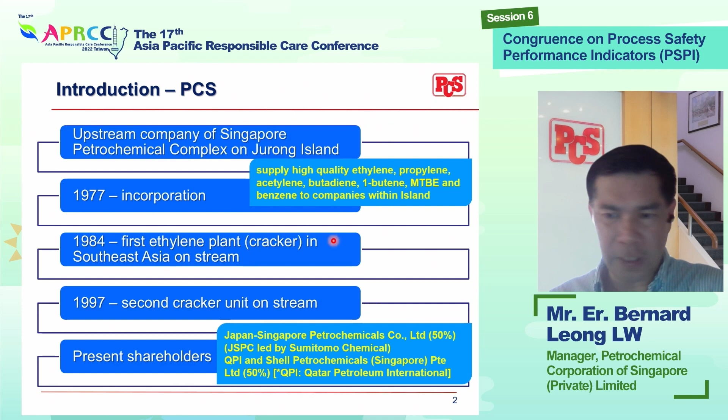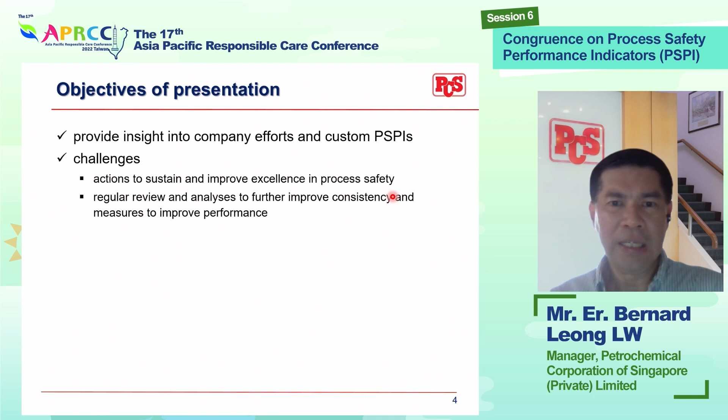For today's presentation, over the next 20 minutes or so, I'll share with you about my company's efforts and what we use as safety indicators, and also the challenges we face, how we're able to sustain and improve safety, and how we regularly review and analyze to further improve the extent to which we can measure performance.

Among the key basic requirements for this program is that it needs to be accepted and embraced by senior management — that's the key thing. In other words, it has to be top-down, and we report the indicators to management monthly and to the board of directors twice a year.

So what we want to do here is have an open discussion. Currently companies may or may not have such a PSPI, and many times we see that companies sort of keep it close — in other words, there is no open discussion on the selection and also the trends in the industry.

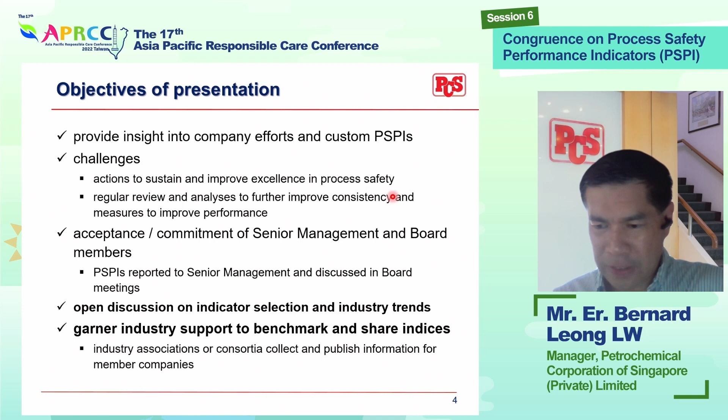I would like to get support from the respective countries' chemical associations, to establish some kind of benchmark and platform to share such indices or indicators. I'm glad if the opportunity arises, perhaps two years later, I can share a continuation of the effort that has gone in after today.

Common indicators are used widely, not just in the process industry, but also in business and economics, even for a country—GDP is a form of an indicator—to measure economic, business, and even operational performance.

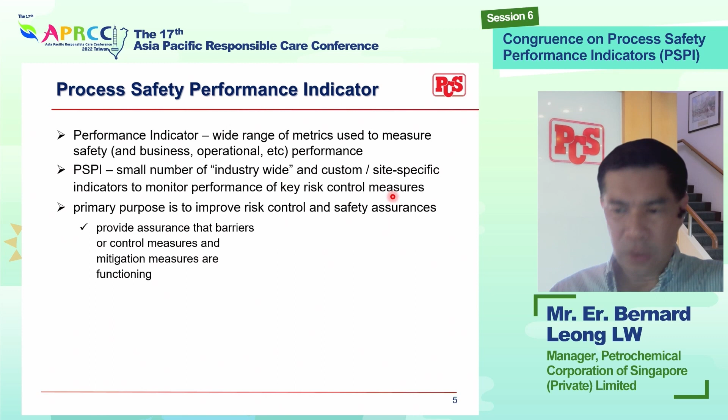Process indicators are mostly restricted to the process industry, and are customarily site-specific indicators to monitor the performance of key risk control measures. The purpose, like all indicators, is to provide assurance that your barriers towards incidents, the control measures, are functioning well. This is the basis for most safety performance systems, like the familiar Swiss cheese model.

We do not want all the holes to align to prevent any incident. So how do we do that? Each one of these layers may be an indicator, telling you whether you're in the right direction, whether you should move the layer in or out, so as not to have it aligned to create a hole or allow any incident to happen.

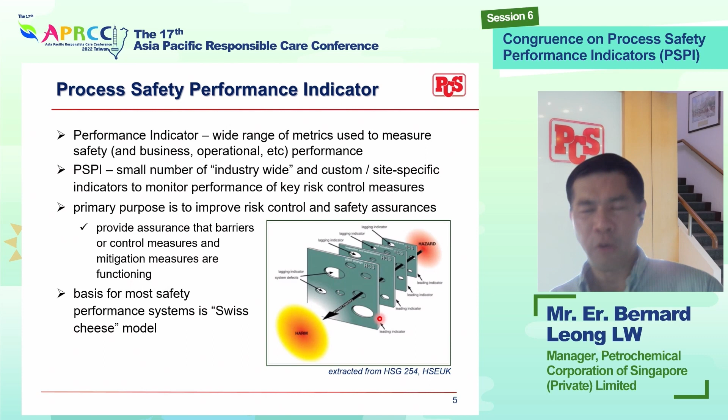The first step is to establish the program and scope. This involves identifying the safety critical activities and the measures in place for critical aspects, establishing priorities and desired outcomes. From that, you need a system to gather, collect, and analyze data, and a format that is easily digestible for reporting to management or peers.

After establishing and implementing the program, that's not the end. You need to monitor performance with regular review on whether indicators are suitable, giving the right direction, the right warning, and pointing to the right activities to take care of. This forms part of continuous improvement, something like a PDCA cycle.

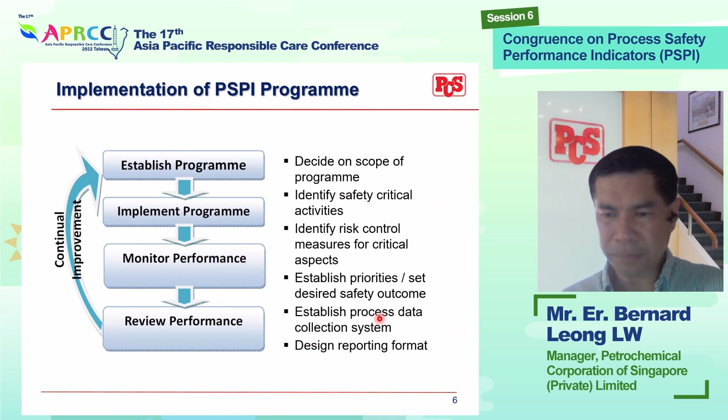From what we've gathered over nearly 20 years of having this PSPI, a well-designed PSPI can provide information on how well risks are being controlled, whether there's any deterioration in measures, and it's a good indicator for early warning of impending issues or problems, or to amplify weak signals of a major incident.

It's like tracking near misses—too many may lead toward a major incident. These are things we look at to give early warning or uncover certain weaknesses in systems. With this, we have two sets of indicators.

One is what we call leading—it provides early warning, a signal for you to act on, something to take into account for how to streamline or improve your systems. The next is lagging—a record of what has happened in the past, like the number of incidents or accidents.

When you track such indicators, if the lagging comes down, it means you're in the right direction. But if leading goes up, you're in the wrong direction. So it's a balance between having leading and lagging indicators.

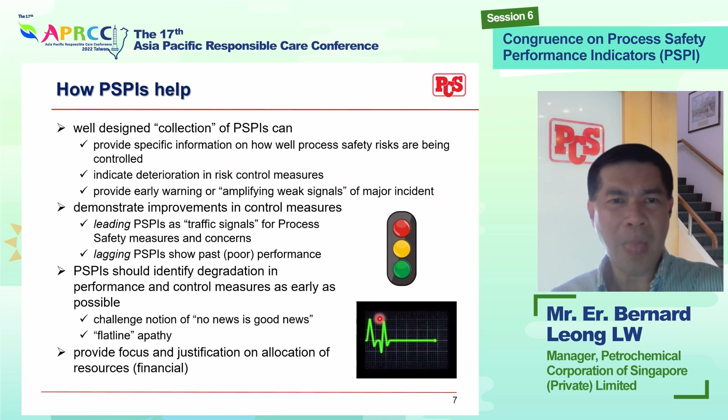I mentioned earlier that the first step is to have risk profiling—understanding your flavor and your taste, how much risk you're able to accept, and what the consequences are.

This also leads generally, if you have many sites, to aligning indicators throughout all the sites, as well as analyzing vulnerability. Having put in place a certain countermeasure, this measure needs to be challenged or tested for any vulnerability to make sure it functions as required.

Also, as I mentioned earlier, you need a balance of leading and lagging indicators, because together they work in harmony, hand in hand, to give you a real picture of what's happening in your whole PSM system. The number shouldn't be too many, because too many and you lose track, you lose focus. Not too many, like 10 or so would be a good number. Too little, and it may not cover what you want. So not too many, not too little.

Now, indicators also need to be set for critical items that you really need to take care of, things like your change management or any deferred maintenance programs. These are things you have to have an indicator for, because they are critical must-do activities. So you pin an indicator to them so it tells you whether you're going in the right direction, whether you're doing the things you must do.

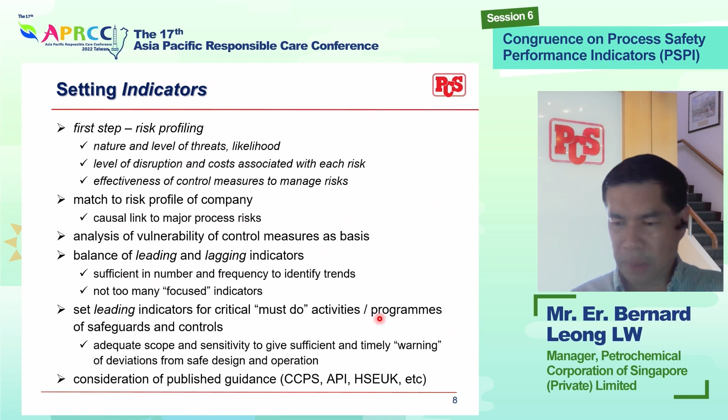Some other things, of course, it must be measurable. You cannot analyze what you can't measure. It must be actionable. In other words, if something shows up, you must be able to act on it, right? And of course, it must be reviewed regularly, based on experience, based on industry, or based on any new inputs or new hazards or new risks. So with these indicators, you're able to actually set your directions for improvement.

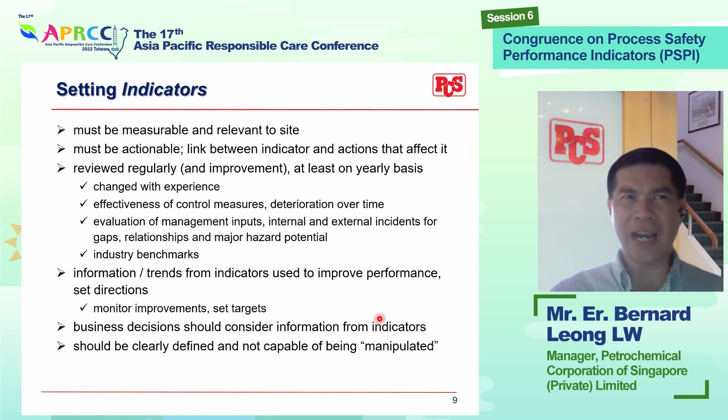Key thing here also is that it must be defined and not able to be manipulated. In other words, stay away from manipulation, because manipulation means you're covering up, hiding some things. The indicator must be robust enough to prevent or minimize manipulation. And of course, someone must be in charge, someone responsible for each and every item or indicator. Otherwise, look at me, I look at you, no one is in charge, no one knows what's happening. So a party or someone must be responsible for these indicators.

Let me speed up, because I look at the time and it's less than 5 minutes to go.

So the choice of indicator could be process upset. Process upset, small ones could lead to a bigger thing. So process upset can be a leading indicator, which is good. It tells you something like early warning or advanced warning of potential failure. It also tells you trends that you need to follow up, like if you have too many backlogs in maintenance issues, too many backlogs in maintenance work requests, that's also a problem that needs more resources put into maintenance.

I mentioned earlier, beware of the flat line, because it is zero or no change. You can't improve what you can't measure. You don't see the change, you don't know what's going on, so you cannot improve it.

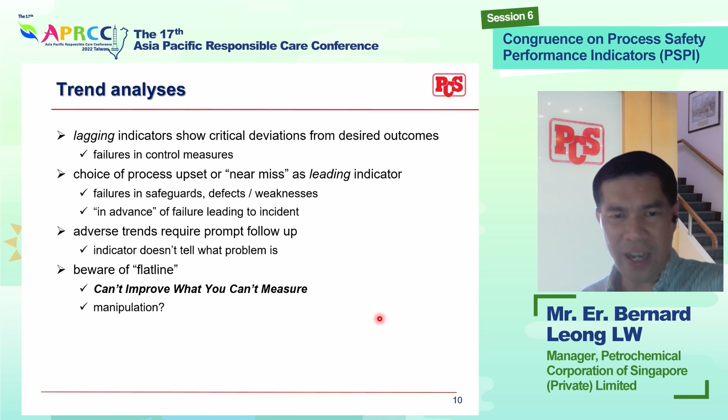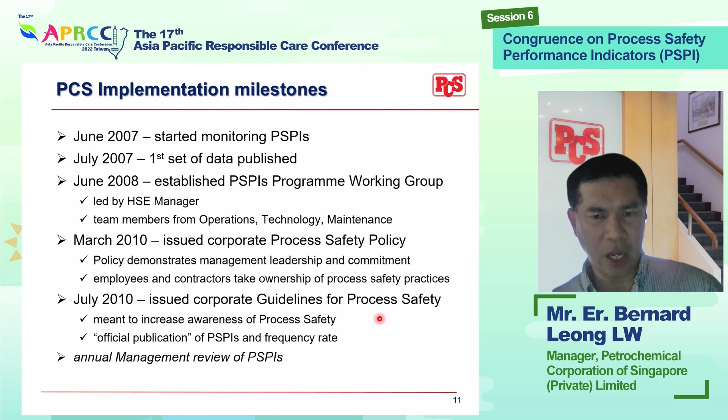Okay, a bit more, just a history of what we are doing. 2007 is when we first started this program. And as I said earlier, you need to have someone in charge, a working group, external party, right? And of course, there must be a regular review. In this case, we do an annual review of the indicators.

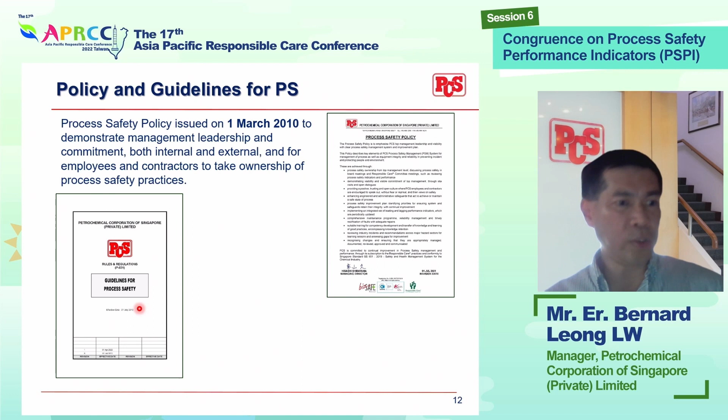So for my company, we have one policy and also guidelines for process safety. These two are the guiding documents, principles for our PSM, facility management, and they also help us define our indicators. When we first started in 2007, we only had 6 indicators. I think all this will be shared with you later. So let me just quickly run through them. We have 6 indicators for a start.

In 2008, we added 2 more. You can see the first few ones are lagging, right? Number of incidents, number of loss containments. Later ones are more leading, things like failure due to corrosion, failure of instruments, number of alarm activations, number of interlock sequences. So these are all early warnings or early signs that you're operating the plant either too close to the design or nearing a sort of danger zone. So it gives you a feel of where you are and how to operate the plant.

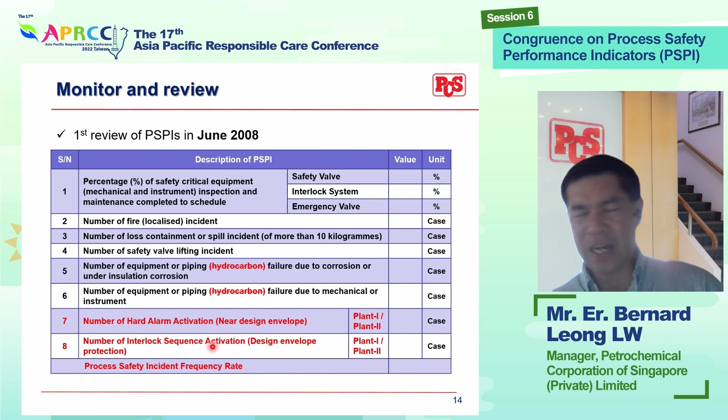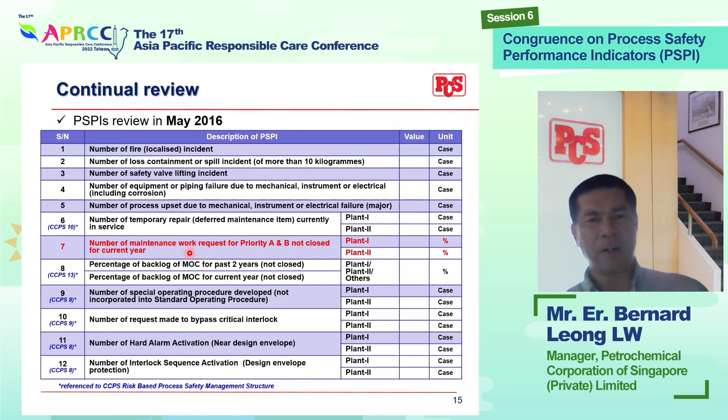So in 2016, we had up to 12, based on the guidance of CCPS at the time. So we added a few more, referencing CCPS as well. One of the key ones we added is the number of maintenance work items that were not closed for the current year, for those priority A and B items, meaning top priority. So if you have a lot of maintenance items being deferred, delayed, or not worked on, it may affect your plant integrity, plant reliability, and in turn it can result in failure or even explosion or fire. So it's also good to monitor the number of maintenance work items raised but not completed.

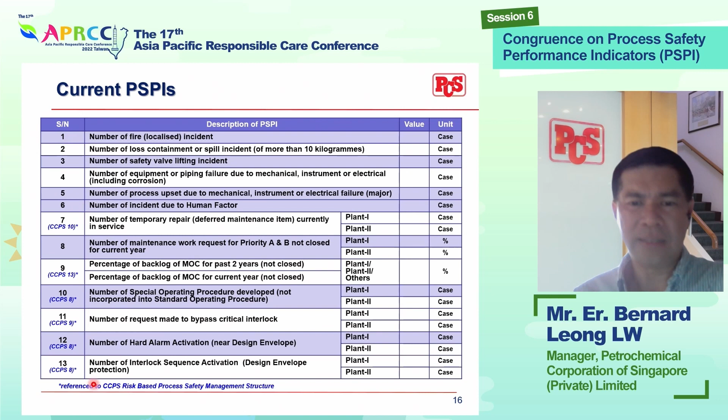And having this program, it also elicits, creates awareness of people on incidents and the consequences. So it sort of makes people talk about incidents, about the consequences, and also about people who are not familiar—they can also act as a third eye. Our contractors can act as a third eye to notice, because they are the ones mostly out in the field, so to report incidents.

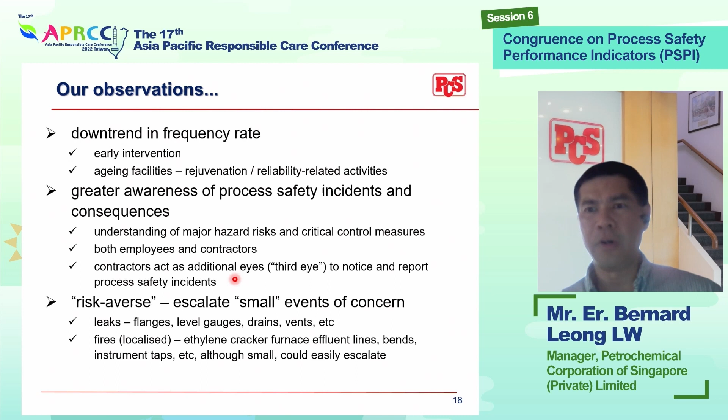So what we learn is that, of course, workplace culture is critical to success—involvement of the workforce with responsibility, and of course you need leadership and management commitment. Safety culture, I can sum in one word: it is how people behave when no one is watching. That defines a good safety culture. In other words, regardless of whether you have someone breathing on your neck or looking over you, you will still always practice safe work.

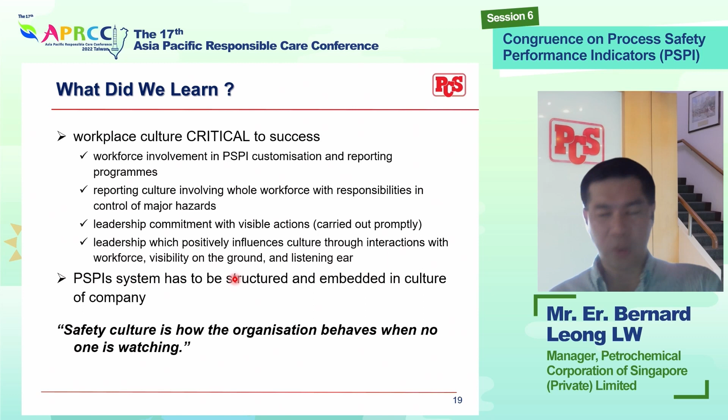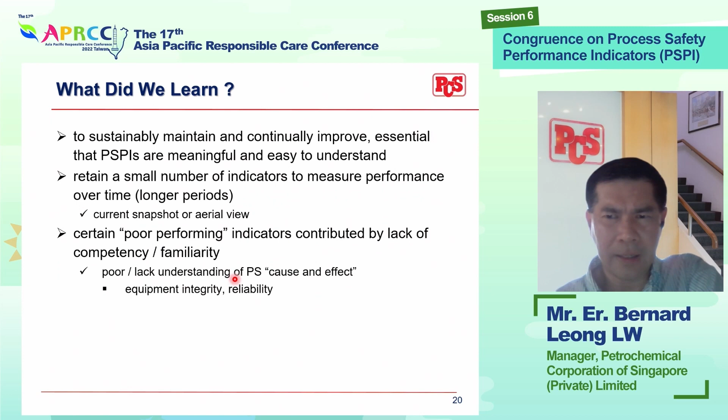So again, to maintain this is a challenge, and of course you need to keep some indicators, and with your review you can always drop off those poor indicators, okay? And we also recently included human error, because we realize that with an aging workforce and new workforce, human error tends to play a very major role in accidents.

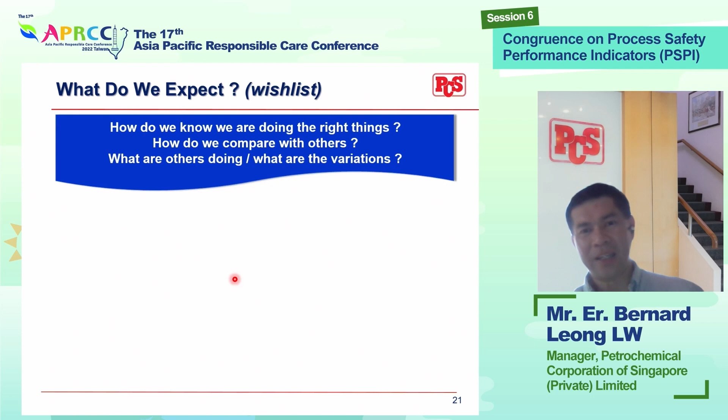So what do we want out of this sharing? It is to elicit feedback, even discussion, on whether we are doing the right things, and how do we compare with others? What are others doing, and what are the variations? So my wish list is to have trade associations collect, benchmark, and publish such information, and of course to encourage openness in the industry for companies to share the indicators and also some trends.

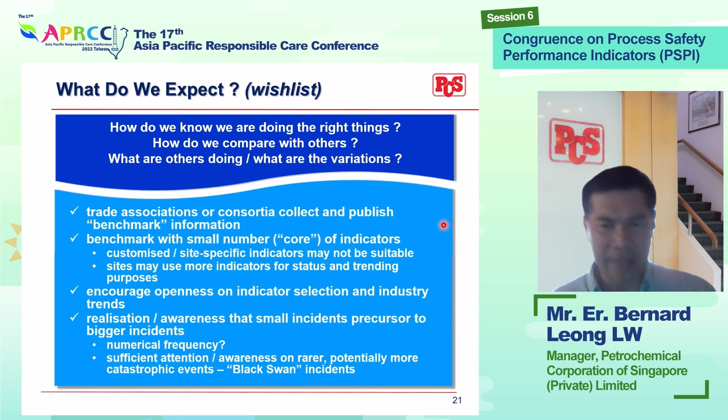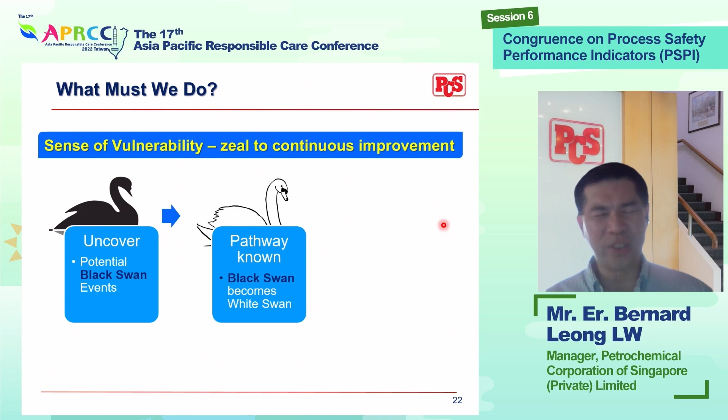So what we must do is, I'd like to share this story of black and white swans. I think most people know swans are generally mostly white. It wasn't until some years ago where people saw a black swan. So a black swan means something which is not normal, out of the ordinary, not normally thought of. Same thing with process incidents—we want to eliminate those black swans in the first instance, things we have not encountered, things people haven't talked about. These are incidents that can happen anytime, and anytime the swan can turn black, it becomes a big incident. We need to always put in effort to make sure that the swan always remains white.

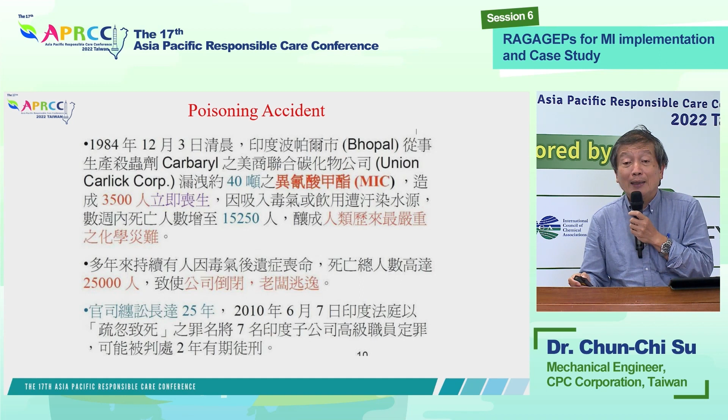First, I'd like to start with a poisoning event. This happened on December 3, 1984, in Bhopal, India. There was a leakage of methyl isocyanate, which led to 15,000 deaths, and subsequently up to 25,000 deaths.

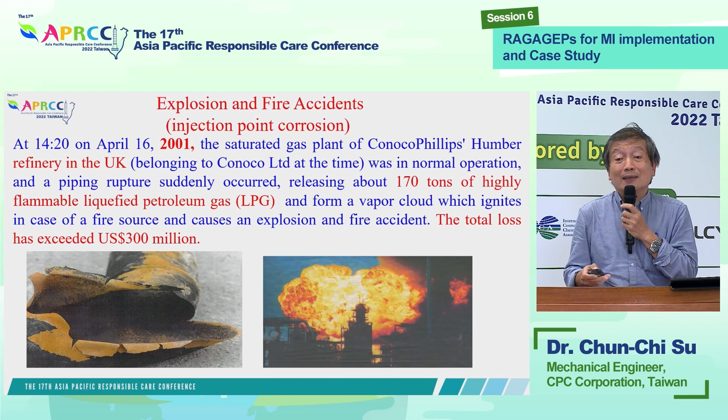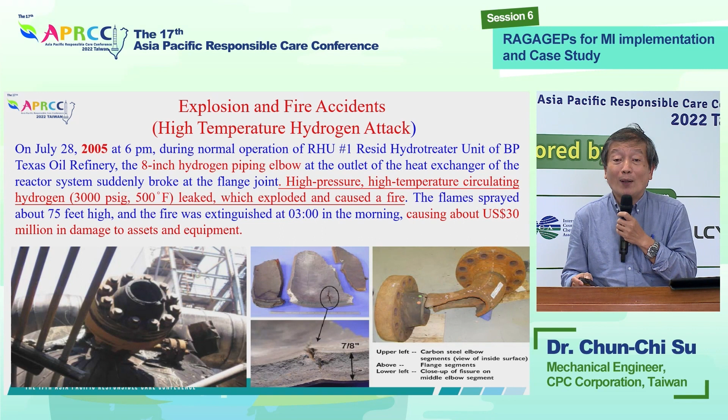Here, this is hydrogen that led to corrosion. This happened in 2005. The company affected was BP Texas Oil Refinery, because of a break at the hydrogen piping elbow. It led to a loss of around 30 million US dollars.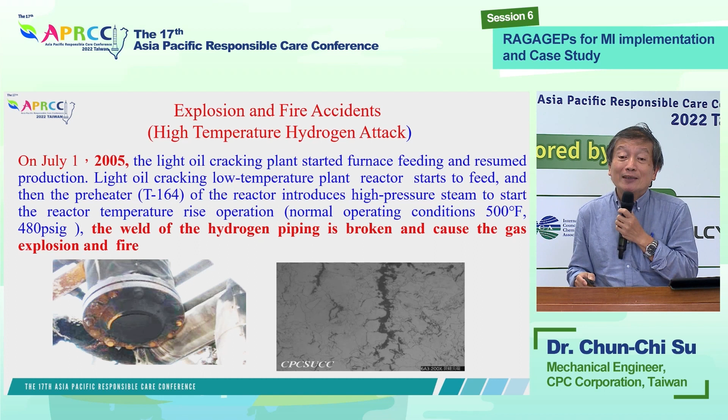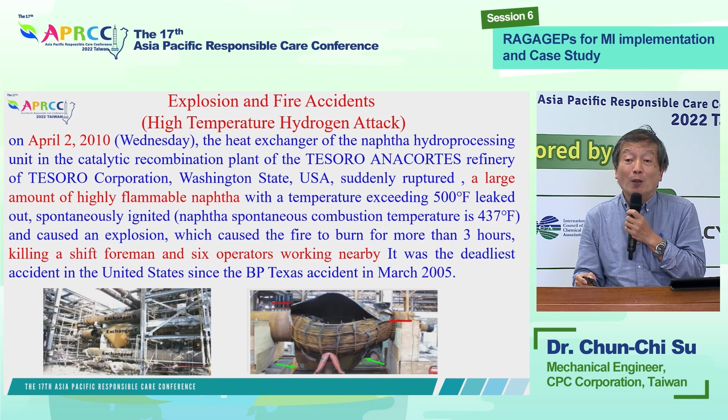Another example was also in 2005, which led to explosion and fire. After 5 years, in 2010, at Tesoro Refinery, high temperature led to an explosion of piping, and as a result, it led to the death of 7 personnel.

We talk about hydrogen sulfide, H2S. It has very huge damage potential, and it will also lead to rupture of tanks.

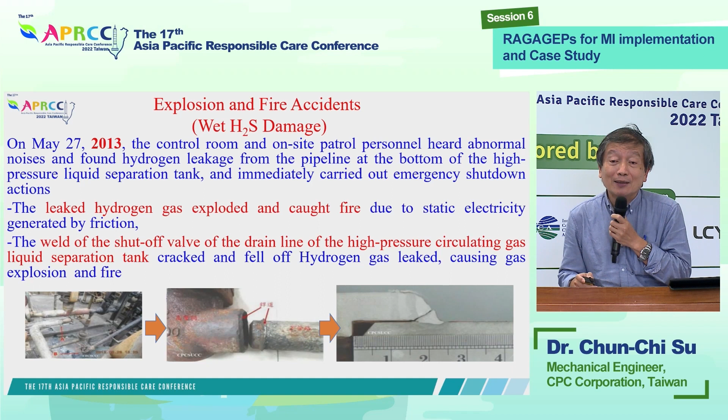In 1984 in Chicago, there was a rupture of a tank, which led to 17 deaths. In addition, in 2013, there was a hydrogen leakage from a pipeline, which led to an explosion and fires.

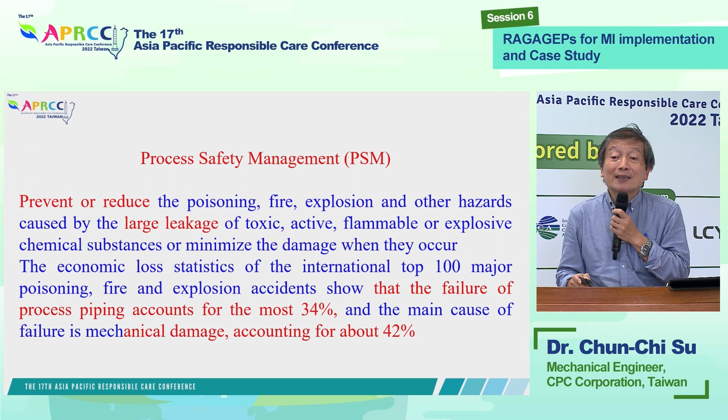I have mentioned so many examples, all caused by pipelines. We know that for process piping, 30% of accidents actually come from process piping, and one of the causes is mechanical failure or mechanical damage. This is the main theme of what I'm going to talk about, and this accounts for 40%.

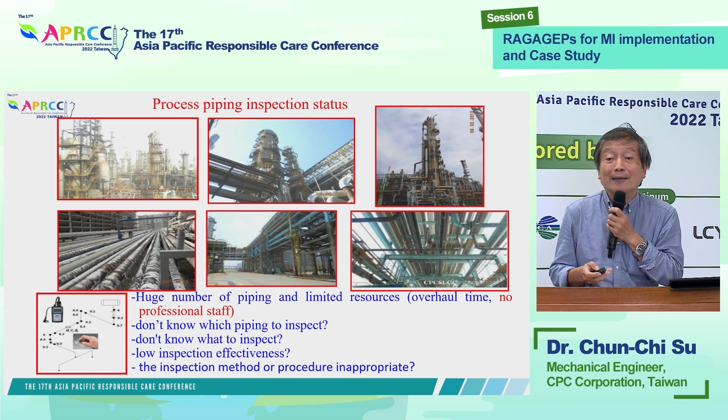Because of the high number of incidents from broken pipelines, and because of insufficient expertise, many times people don't know which pipelines to inspect and what to look for. Are they going to look for rupture? Are they going to look for cracks? Or what are they actually looking for? In the past, they normally used a device to check for leakage. However, this is normally insufficient because different kinds of leakage require different technology to be used.

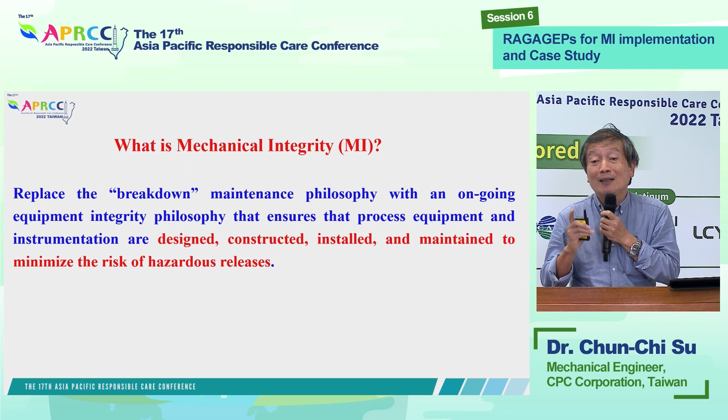Today, I'm going to talk about mechanical integrity, MI. What is mechanical integrity? Basically, this concept replaces our past understanding where we only fix something when it's broken. However, we need to take preventive measures in terms of mechanical integrity.

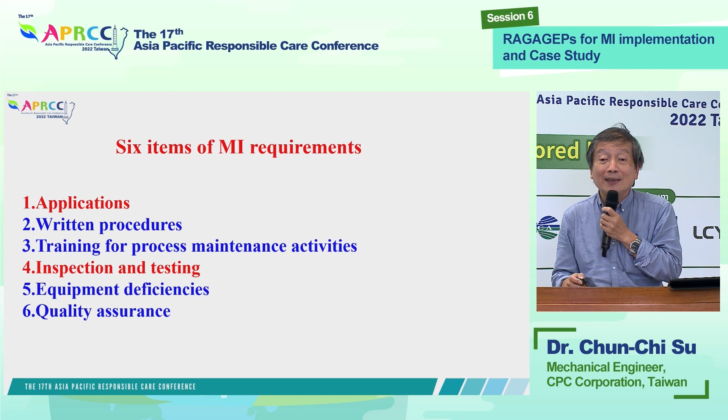There are 6 requirements of mechanical integrity. We'll look at number 4, which is inspection and testing. OSHA in the U.S. says that inspections should be performed on process equipment. This is our main theme today, RAGAGEP, which stands for Recognized And Generally Accepted Good Engineering Practice. There needs to be good engineering practices, and we should also follow manufacturers' recommendations.

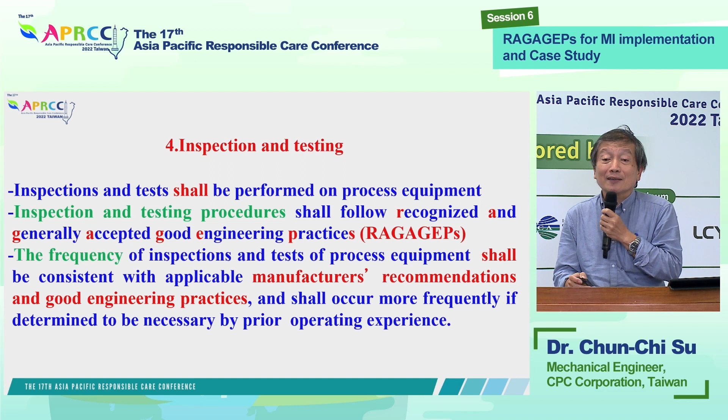We can use RAGAGEP in order to solve some of our safety issues. So what is RAGAGEP? They are actually a set of guidance documents, codes and standards formulated abroad. There are 3 types of guidelines: first, government regulations; second, manufacturing and process licensor programs; and third, industry standards.

In the absence of all of this, a company can also base their practice on operating experience and policy, and also those of insurance companies. So these are some of the basis of RAGAGEP. If we look at process piping, we start from design, manufacture, and installation. We know that process piping is manufactured according to Section 5, and during welding, it's based on Section 9.

During operations, we need to know whether there are risks for our pipelines. We often talk about RBI, risk-based inspections, so we base this on API 570. We can also use API 580. In Taiwan, the government hasn't specified how to inspect piping, so we use what is commonly used internationally, which is API 570.

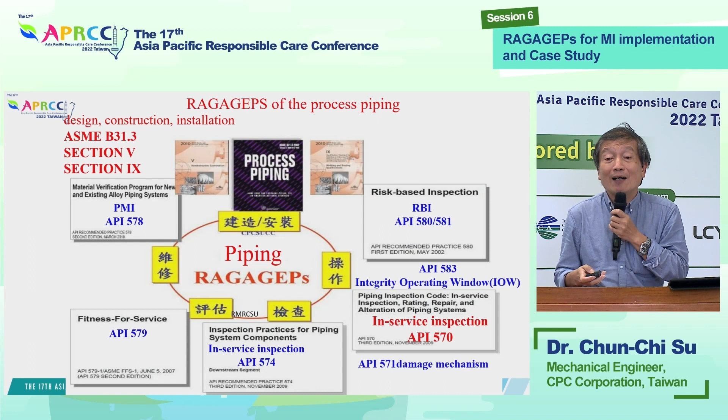Therefore, we see that from manufacture, from installation, from operations, there are actually very good engineering practices from which we can take reference.

API 570 is actually the code for pipeline inspection in the U.S. It has very clear specifications on how to inspect, what damage mechanisms we should look for, just like a person—whether our diet or lifestyle will lead to what kind of disease. There are specific tests for these different kinds of diseases. Therefore, there are also different kinds of inspection procedures for different kinds of pipelines and potential defects.

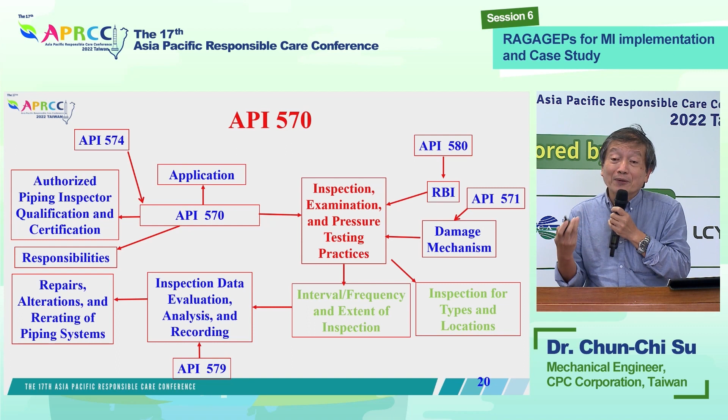It also mentions the frequency of these inspections, and the evaluation of data, which is based on 579. How do we carry out post-inspection data analysis? All of this is clearly specified in API 579. In our company, we have experts who are responsible for this.

Next, I have some examples to show how RAGAGEP is used in MI. We talk about API 570. It tells us the potential defects of process piping. So let us look at examples. First is leakage accidents caused by non-compliance.

This is non-compliance with API 570. Many times after the fact, we find there is non-compliance with 570. This is one case - a pressure tubing with a diameter of 1/2 an inch, using low pressure and high pressure to atomize the steam flow. Suddenly there's a break in the piping, and it led to a very huge fire.

After inspection, it was determined that it was caused by a fatigue fracture, occurring at the thread where there is a weld. If we look at ASME B31.3, we can see this is a seal weld, and it's specified that seal welding shall be done by a qualified welder.

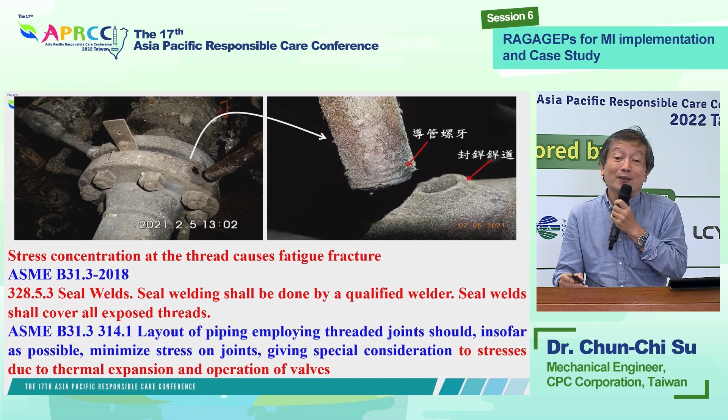And if we look at 328.5.3, it says the seal weld shall cover all of the exposed threads. However, upon inspection, it was found that not all threads were covered by seal welds. In other words, this welding was not carried out in accordance with good engineering practice.

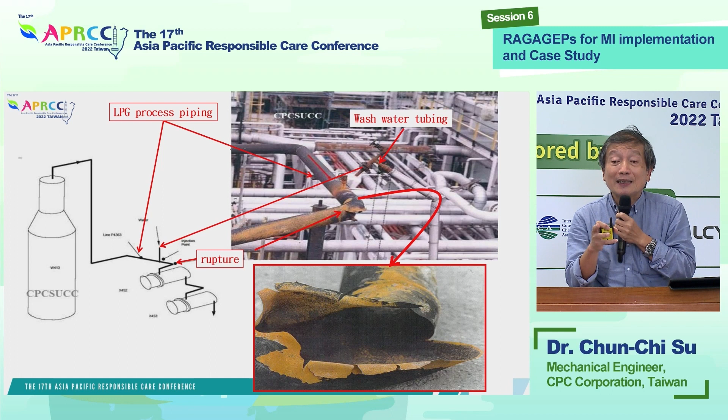We have another example. This is the LPG process piping. Normally, the piping is washed with water. This is what we see in the slide, on the upper right-hand corner - we have wash water tubing, and the first elbow becomes very thin.

And we look at API - 30 years ago, it already mentioned that the water inlet from the first elbow to the second elbow is a very important point for inspection. However, this company forgot to check the elbows. So there was a rupture at the first elbow, and unfortunately API was correct in saying we should look very carefully at the first elbow.

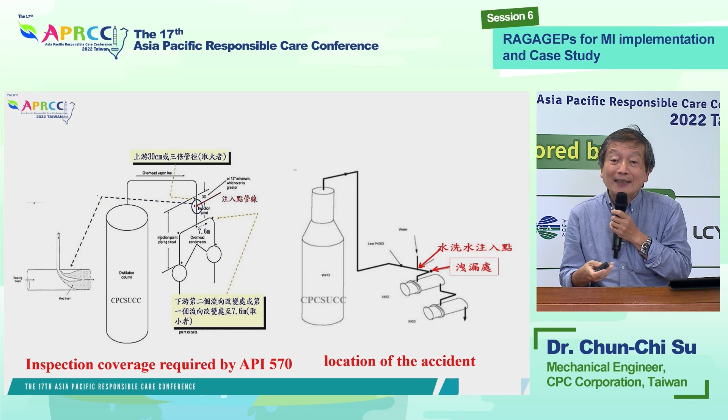In other words, if the company had known that API required inspection of the elbow, maybe this accident could have been prevented. Next, we talk about contact point corrosion.

According to API 570, localized corrosion at pipe support contact points is a result of crevice corrosion due to deposits. In other words, it is less of a point and more of an area. Therefore, if not inspected, it will lead to leaks.

In the past, if we look at the API text, there is no picture. So if we just look at the text, we don't know what is a contact point - we don't know what is a point or what is an area. However, if we have a picture like this example, then everything is very clear.

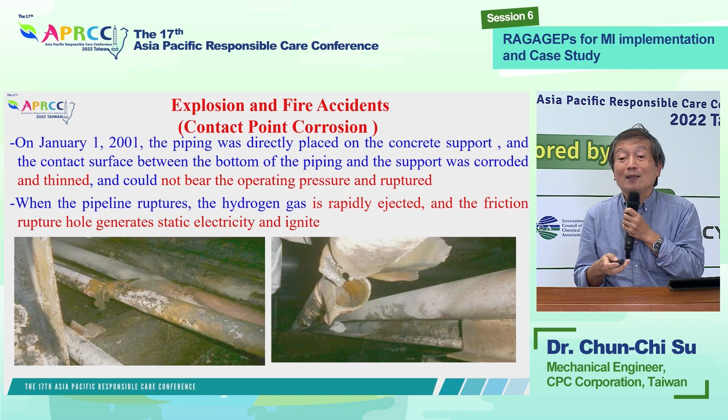This happened in 2001. The piping was directly placed on a concrete support, and the contact surface between the bottom of the piping and the support was corroded and thinned, and it ruptured. Unfortunately, there was a leakage of hydrogen and it led to an explosion.

This is the fourth example. Again, this is API 570. It talks about dead leg corrosion. Some people may not be aware of what a dead leg is. It says there needs to be very clear inspections to look at the thickness of the dead legs.

This is a high-pressure hydrogen tank, and the safety valve is stationary - dead legs refer to something that is stationary. There's no liquid flowing through it.

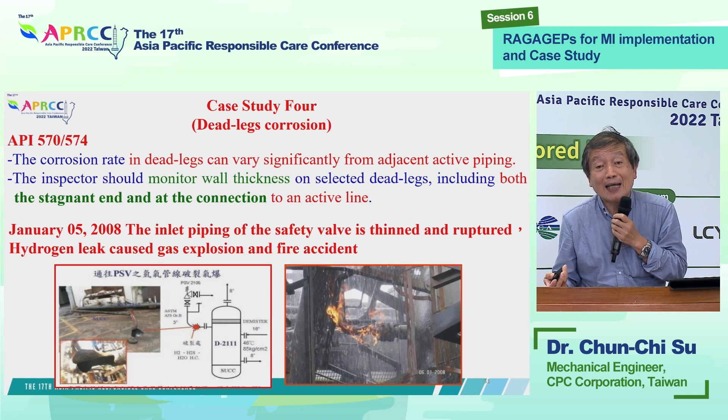So this factory actually inspected all pipelines and storage tanks. However, it didn't inspect this connector. Therefore, because of this defect, there was an explosion. This is also a failure to comply with API 570.

In addition, we talk about not knowing which pipeline to inspect - these are examples of not knowing what to inspect. Here is not knowing how to inspect. For instance, are we going to use a UT scan or profile RT?

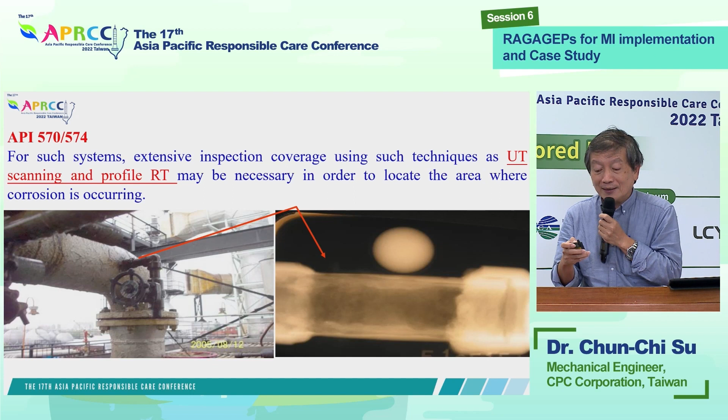In this instance, if we make use of profile RT, we can very well identify the defect. If we look at the right-hand picture, we can see very clearly there is a thinning of the pipe. This is a global inspection. Another example.

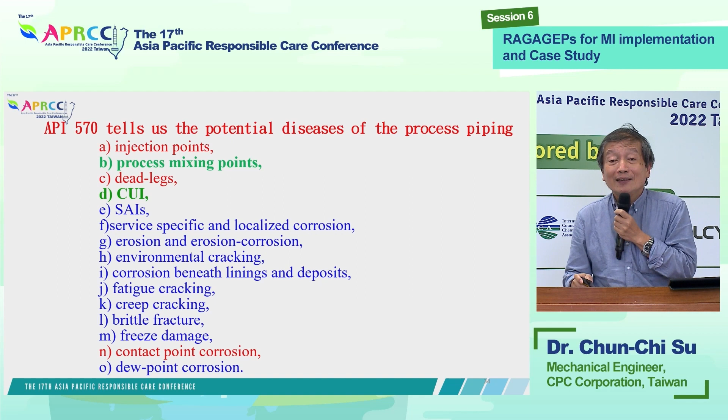API 570 actually laid out several guidelines. For instance, we talk about dead legs, we talk about injection points. These are unfortunately what API has covered. Next, I'd like to give you another case study.

First is the mixing points. Mixing points are locations in a process pipeline where two or more streams meet. API 570 actually has some statements on a mixing point - it is a point where streams meet. And at this point, there will be a very huge temperature variation, and it will thin at a faster rate, or it will lead to a faster mechanical damage.

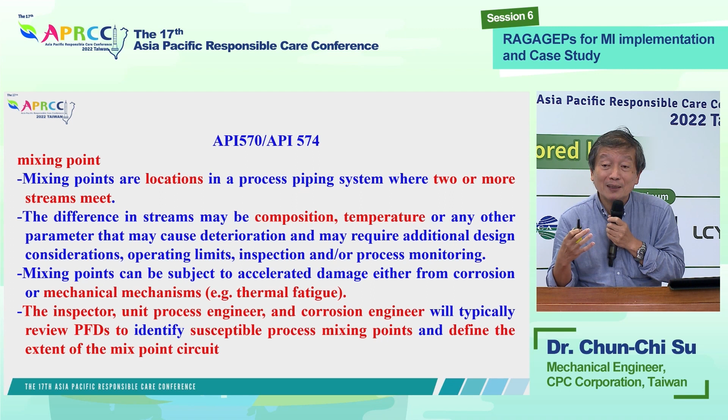Because of difference in temperature, there will also lead to thermal fatigue. As a result, the process engineer, the inspectors should be more careful in reviewing the PFDs to identify the susceptible points and then define the extent of the mixed point circuit. We follow what API has told us, and then we use this to review our process.

Upon review, we can see that the RDS, the quenching gas, yes, we have a 4-inch hydrogen quenching piping. The temperature inlet is about 360 to 400 degrees Celsius. And at the quenching point, the temperature is around 60 to 70 degrees centigrade. With more than 300 degrees in the thermal difference, it will lead to thermal fatigue according to API. The actual picture is as shown below.

We also have to look whether this kind of risk is high or low. Upon inspection, we use API 574, which says that as long as there is more than 300 degrees difference in temperature, it is a high-risk point for fatigue. And earlier, our example has actually exceeded 300 degrees. So this is a high-risk point.

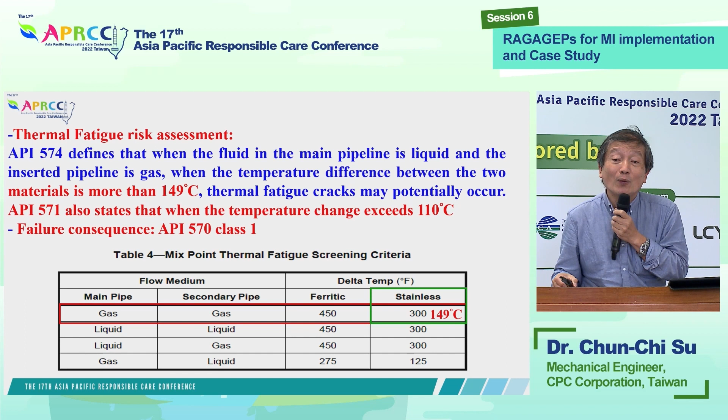The gas involved is hydrogen, and we followed API 570, and we classify this as class 1. Therefore, we carry out a very comprehensive inspection to see whether there will be thermal fatigue at the mix point. We make use of a very efficient inspection technology.

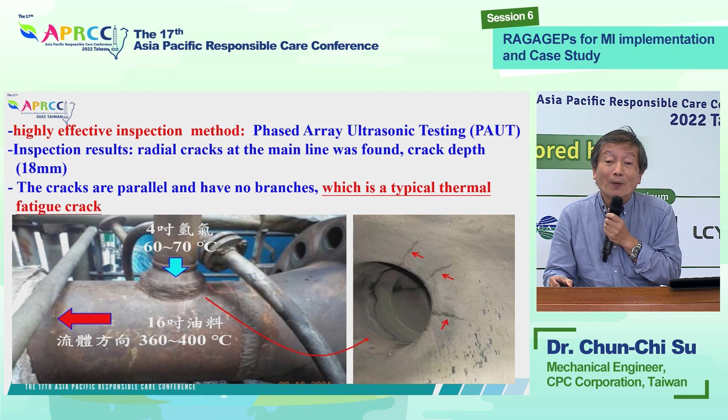After inspection, we saw some cracks inside. Once we opened the valve, you can see on the right-hand side corner, there were several cracks. We can see that this is actually thermal fatigue as indicated by API 574. This thermal fatigue will lead to possible leakage of high-pressure gas. Of course, once we have this kind of leak, we need to prevent and mitigate.

After our inspections and analysis, we found that the cracks are still workable, still within tolerant limits. But going forward, we need to be able to avoid mixed point limits. Again, we follow API and install a thermal sleeve in order to prevent thermal fatigue.

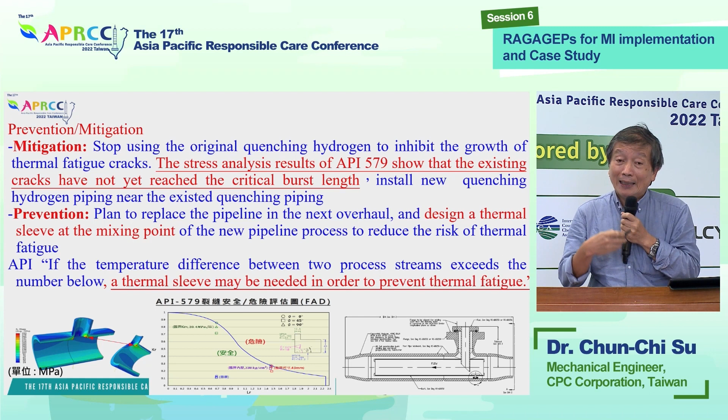I showed you this example to show that many companies may not have material experts. They may not have experts on corrosion. However, if they are able to just read carefully the best engineering practices laid out in API, they will be able to solve many problems. They will be able to carry out inspections at the proper points, at the proper frequency. All of these are actually specified within API.

My second example is corrosion. This is something that's very common to many industry sectors because we have a change in temperature outside and inside the valve, and there's a liquid flowing inside, and this will lead to corrosion - whether this is for steel industries, for the chemical industries, or for the petrochemical industries.

It is very clear in API that the temperature range is from minus 12 degrees centigrade to 175 degrees centigrade. It says that the corrosion will be localized to wherever the material has been kept wet by wet insulation. Therefore, here we are very clear on the different points where we should inspect. This is a very good example - the propylene rectification tower. This tower is about 60 meters high, and it has been in operation for 32 years.

If we use API 570, we can see that the carbon steel temperature range is minus 12 to 175 degrees centigrade. Therefore, we can see that it is a potential CUI issue based on API statements. Next, we need to identify whether the risks are high risk or low risk.

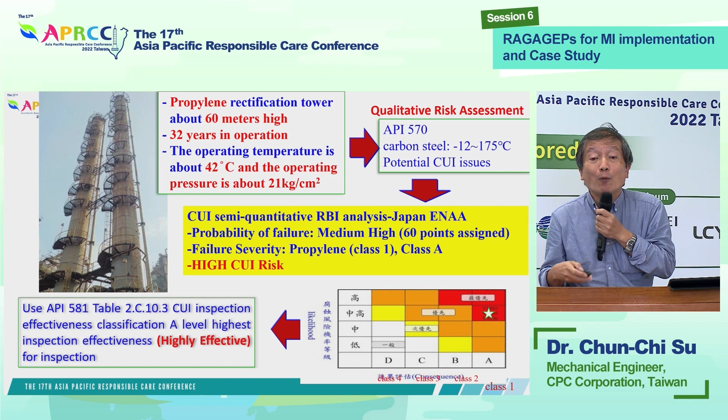We make use of ENAA of Japan to carry out analysis. I will not bypass the analysis steps, but the results show that according to API, it is class 1, which means if we look at the final analysis, it's very high risk. With this very high risk, we look at API 581, which is risk assessment. It tells us to use inspection effectiveness category, using highly effective efficiency.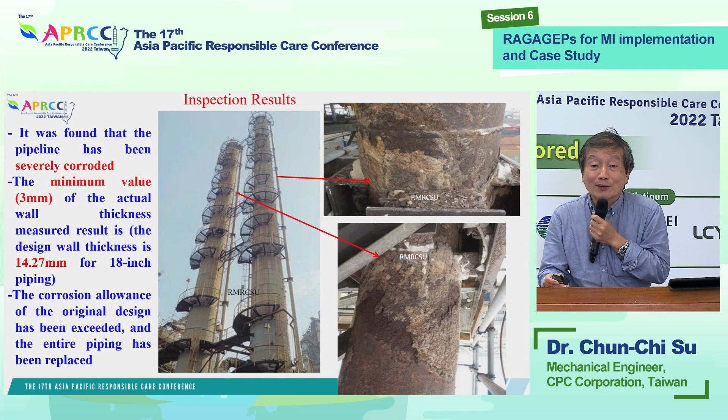This is the inspection results. It was found that the pipeline has been severely corroded. In other words, there is risk of explosion, and therefore we replace the pipe. Also looking at the surrounding support ring and near the platform support steel, there are also obvious CUI. The depth of corrosion has exceeded the corrosion allowance, so we conducted a fitness for service assessment, FFS.

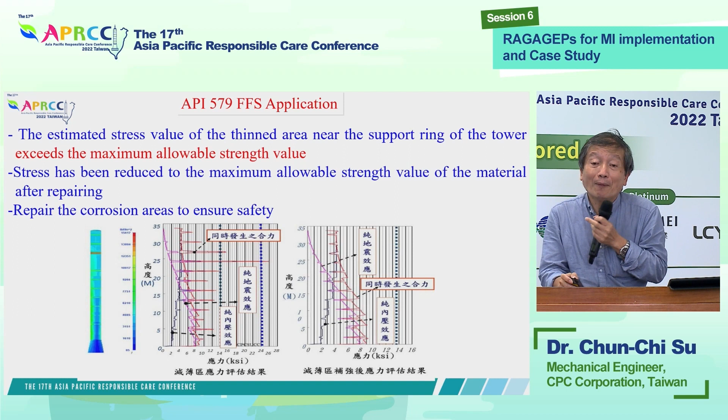After assessment, we found that if we did not carry out any repair, there might be a risk of collapse during an earthquake. That's why we carried out different repairs and fixes. Afterwards, everything was back in order.

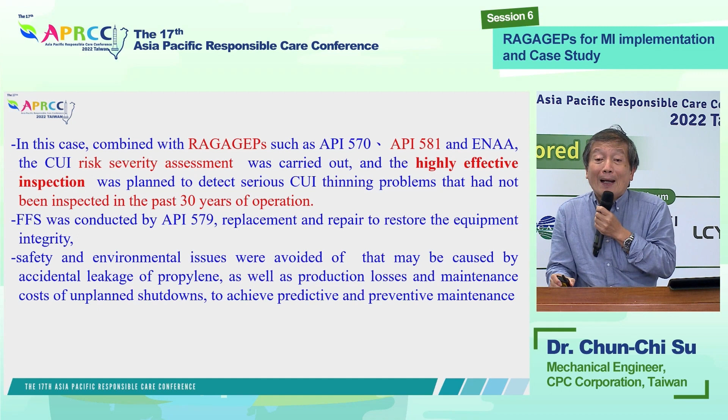In this case, we actually made use of RAGAGEP, including API 570, API 581, and ENAA of Japan. We carried out inspections and sorted out all of the defects that we hadn't found over the past 30 years. Because of this, we were able to minimize potential loss going forward.

Finally, I'll come to my conclusion. If we look at our past experiences of fires and explosions, most were caused by the inability to make use of good engineering practices. It is very important to make use of good engineering practice to look at our pipelines, to define the level of risk, and to make use of the recommendations from this engineering practice to carry out the necessary measures to correct them.

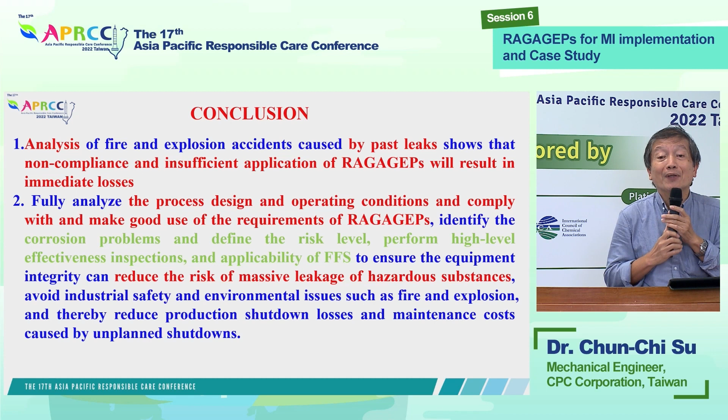I believe that by using good engineering practices, we will be able to lower risk and also minimize leakage of hazardous gases, and it will also help increase the safety of our factories.

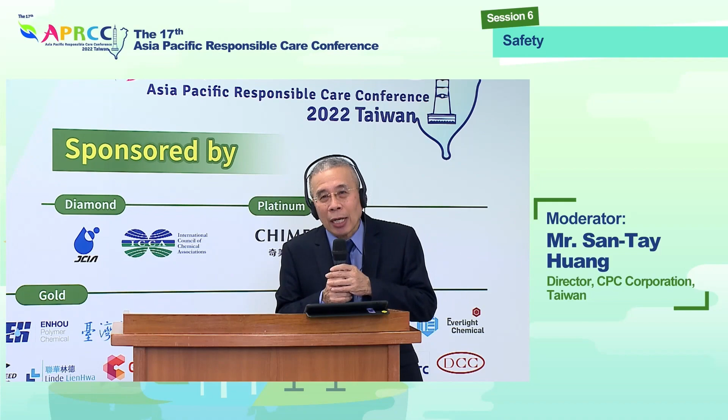And we just stop for now, and then I will hand over the floor to Mr. Xiao. I hope that right now Mr. Xiao will be ready. I would like to apologize. There seems to be some problem preventing me from entering your system. However, we are able to hear you. Well, because I'm speaking on my mobile phone.

So first, let me quickly introduce this AICM. So I present RCC Responsible Care and Chair for AICM. AICM was really established in 1988, and represents nearly 70 major multinational companies in the chemical industry of China. So those companies cover manufacturing and transportation, distribution, and disposal, the whole value chain.

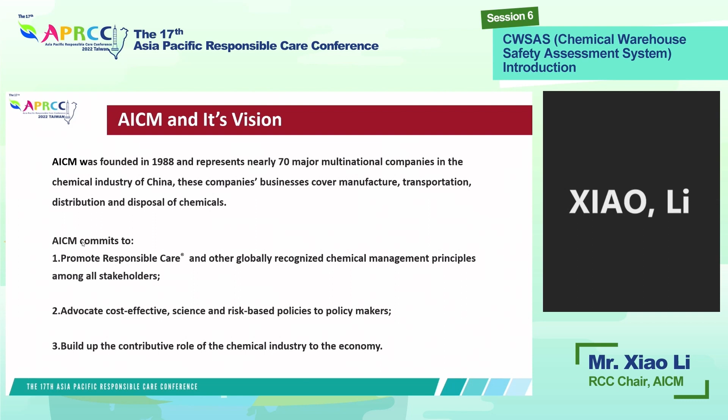For AICM, we have a clear commitment. First is really to promote responsible care in China, and also other globally recognized chemical management principles among all stakeholders. The second one, we also would like to advocate cost-effective and science and risk-based policies to policymakers. We know quite well in China how to support the whole chemical industry to make science-based policy on this part. Another part we think is important for AICM, as a multinational association with member companies, is how to build up the contribution role for the whole chemical industry. Next slide, please. This is our AICM member companies.

As the AICM association, we serve as a bridge internationally. We do collaboration with ICCA, RCLG, CEFIC, and APRO, all those kinds of international associations. Meanwhile, for the local China part, we connect with local government, technical associations, academy, and NGOs. We think AICM should really strive to extend our partnership with all stakeholders.

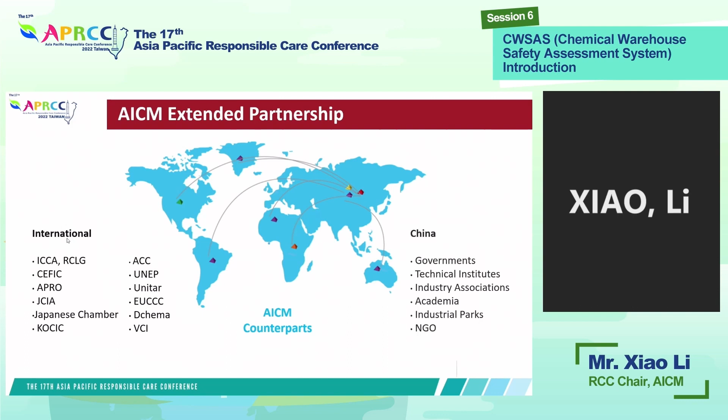Then we come to my topic regarding our chemical warehouse safety assessment system. Before I introduce that, I would like to share with you the CRSAS, Chemical Road Safety Assessment System.

Actually started from 2008, AICM started to work together with MOT, the Ministry of Transportation. Then we developed our so-called Chemical Road Safety Assessment System. The background is quite clear, because at that time we thought the safety situation in China for road transportation of chemicals was not so good.

We wanted to do something with all the member companies, also for the whole chemical industry. Already 14 years have passed. I think it's been a long journey, but with all the effort of AICM member companies, already 22 AICM member companies have started to use this system. This system can support chemical companies in conducting third-party assessments.

Meanwhile, we've already extended this system to other local companies. For example, a big local chemical company has also started to use this kind of system.

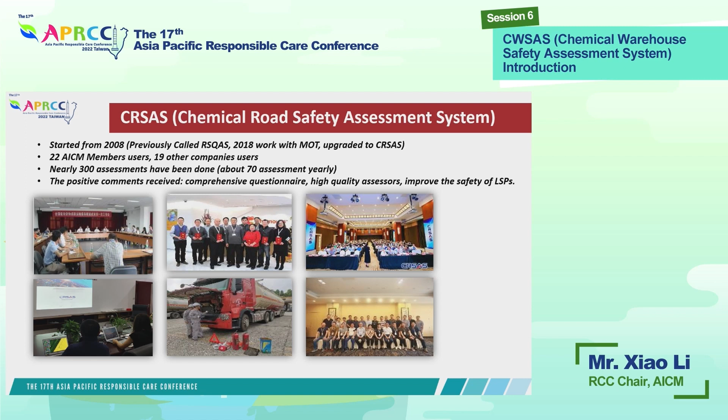Then we thought maybe we could do something more, extending to warehouse management. So we decided we needed another system, CWSAS - this is the Chemical Warehouse Safety Assessment System.

The background is quite clear, because recently, as you know, so many accidents have happened, either in China or globally. So we think it's really important for us to properly store our chemicals and properly manage chemical warehouses - how we can support sustainable warehouse operations in the chemical industry in China.

Recently, the chemical industry in China has been booming, with so much investment, creating really big demand for chemical warehouses. For member companies, we have some challenges - it's difficult to find really qualified hazardous chemical warehouses. So we set up a similar system.

This system supports our member companies in easily finding a qualified warehouse through assessment. It also saves cost and effort, because previously, if one company needed to find a qualified warehouse, we needed people to do the assessment individually - it took a lot of time for everyone.

Meanwhile, by doing this system, we also want to further improve the whole chemical storage industry's EHS management competence, because through this kind of system we can do a lot of training and introduction for all participants, especially the small players. This also brings more value to all the member companies.

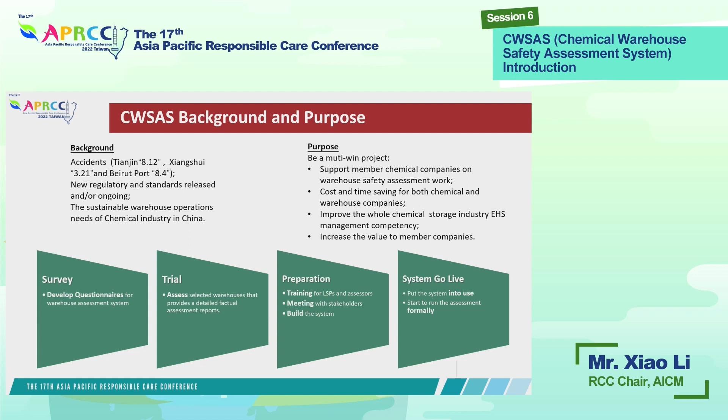This is the basic setup for our CWSAS. You can see we set up one independent third-party platform. If any warehouse needs assessment, they send a request to this platform, and then we assign a qualified assessor to conduct the assessment.

This system has a standardized assessment questionnaire, covering local legal requirements along with specific requirements put together. This really combines input from all the member companies - I think also for multinational companies, quite similar. After that, the system also has qualified assessors.

We also regularly do some evaluation. A qualified assessor can do this assessment. If he's not qualified, he will be eliminated as an assessor in the system. Also, this is really based on facts, based on the questionnaire. We have no grading assessment. We are not disqualifying any warehouse. We just put all the facts based on the questionnaire - what's the fact observed during the audit? This can support the member company to further conduct assessment based on all the findings, whether it meets the company requirement or not. This is the overall structure.

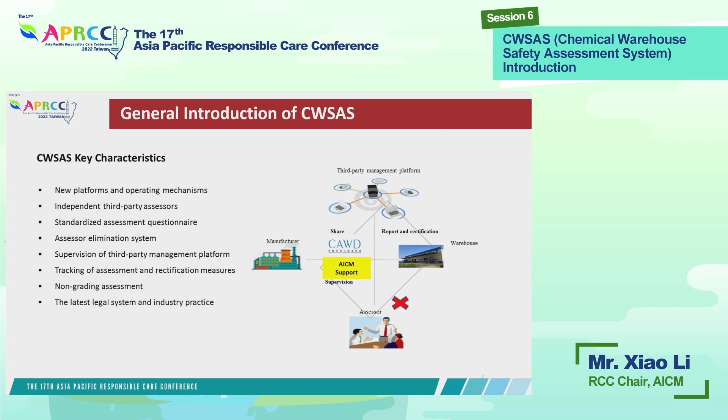For this CWSAS system, setting it up was not so easy. We started from the end of 2020. First, a lot of discussion - we set up the technical committee and had meeting planning. We also did preparation and collected all the input, like the local legal requirements, CEFIC, and the questionnaire. Then we discussed all the procedures and assessment, and prepared this questionnaire.

We also reported this project to RCLG, asking for support. With support from RCLG, we conducted several rounds of capacity building to discuss with all stakeholders how to make this questionnaire and system. Luckily, we announced go-live in August 2022 - you can see the picture before. During our AICM and RCC meeting, we launched this system go-live. Now we already conduct assessor training. We targeted to formally go live for this CWSAS system to conduct assessments at the beginning of 2023.

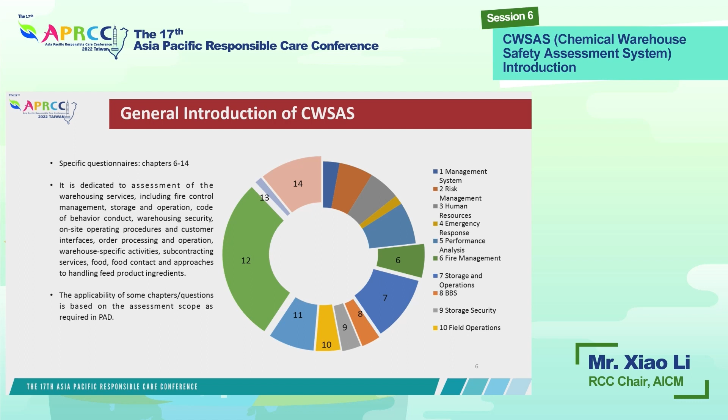That's a very quick introduction about CWSAS. This is my last slide. I would like to say CWSAS is really a beautiful thing - it can do tailor-made warehouse safety and readiness assessment because it has such broad content inside. Also, you can customize based on your needs. Another important thing is business networking and benchmarking, because so many member companies are here.

We also want to know the differences in different regions' warehouse management situations. It can easily provide transparency for every member company regarding warehouse and safety management situations. Another important part is ensuring compliance with regulatory guidance already built inside. So when you conduct these assessments, afterward you can find a qualified warehouse and service provider, then sign your contract that can fully meet your company's and local legal requirements. So I say this system will definitely benefit the whole chemical industry in China, especially in the coming days.

We think more about the demand in China, so also how to improve this warehouse and performance. That's my sharing, thank you.